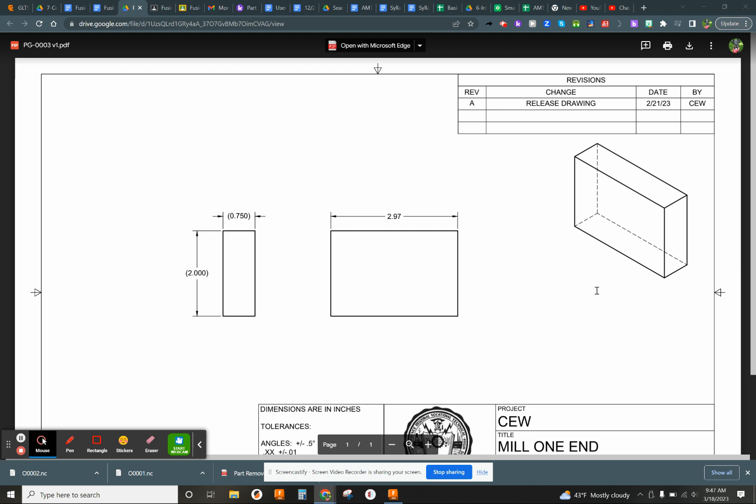We're on to the next part in this series, PG-0003. What we're doing is we're going to use Fusion 360 to make code and mill one end off to clean. So we're going to bring our model down to 2.97 long. I have already renamed my file for PG-0003. So stop and do that right now if you have to do that.

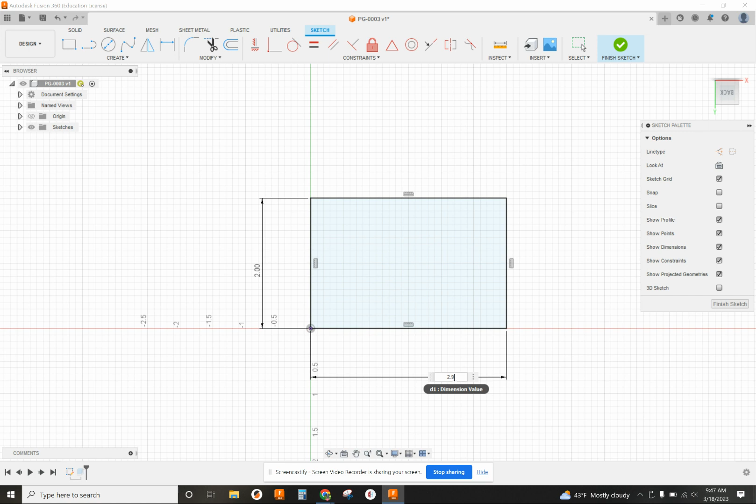So file, save as PG-0003. We're going to go back to design, and we're going to open up our sketch down here and change this to 2.970. Finish that sketch. It'll update the length of our part to 2.970. Going to go back to manufacturing. All right. And we're going to do a new setup. And we can do it facing this same way.

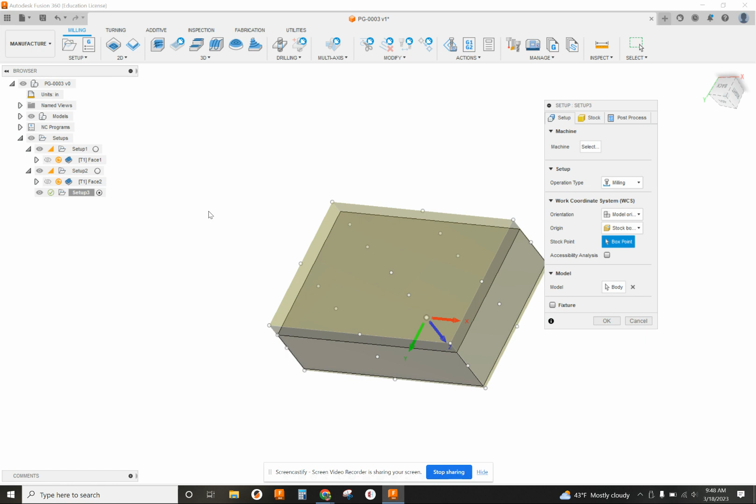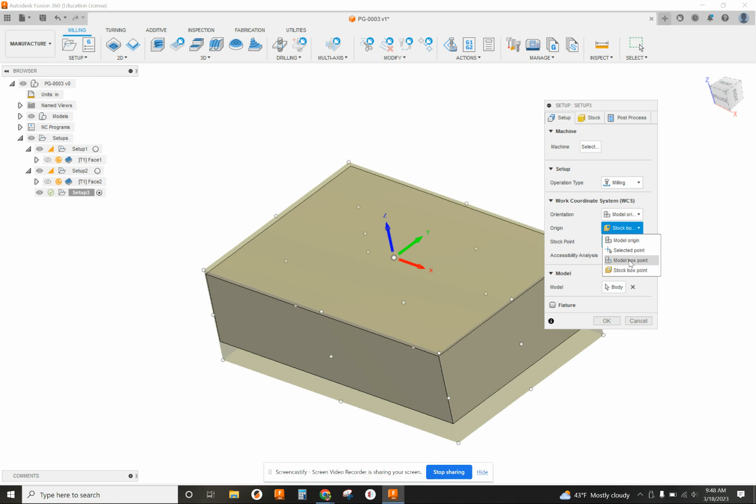Setup, new setup. Oh, actually, looks like we want to flip this upside down. That's fine. We're actually going to change something here, but we can keep this orientation. What we want to do is change where this point is here, where the X, Y, Z come together for our datum. We change the origin from stock box point to model box point, and then we're going to click this one up here.

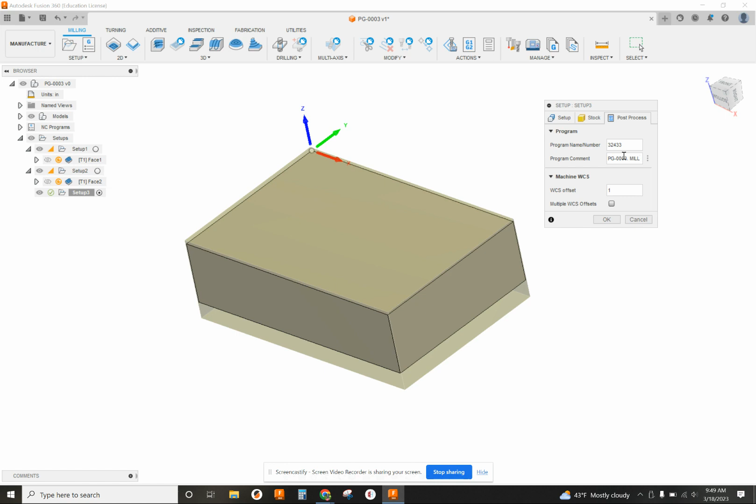So we want to ignore this stock that we've already cut off and basically go to the part where it is currently. Make sure that's done, or it won't work right. The stock will be fine as it is from previous. And post-processor, we want to give it some other name, whatever you want it to be. And then, of course, our comments, PG-0003. And this is going to mill one end clean. G54 upper left.

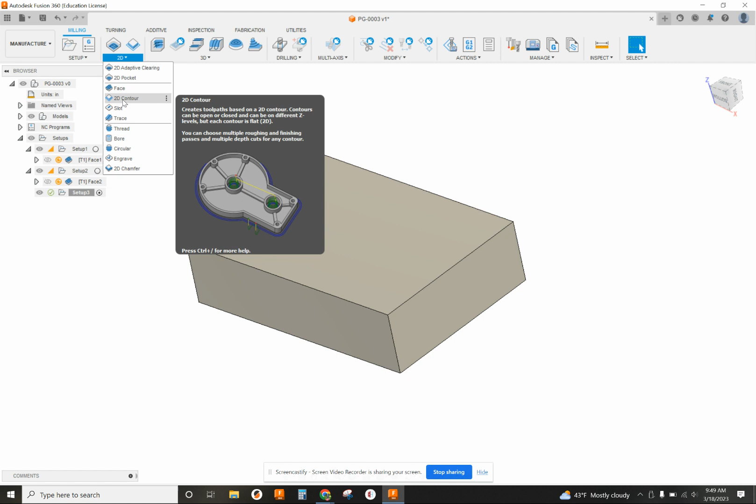Okay. So now for setup 3, we're going to do what's called a contour. So click on 2D, then on 2D contour. That just means it's just going to cut along an edge. So we're side milling, right? We need our tool. It threw the facing tool in there. That won't be good for side milling. We need to go make an end mill for this.

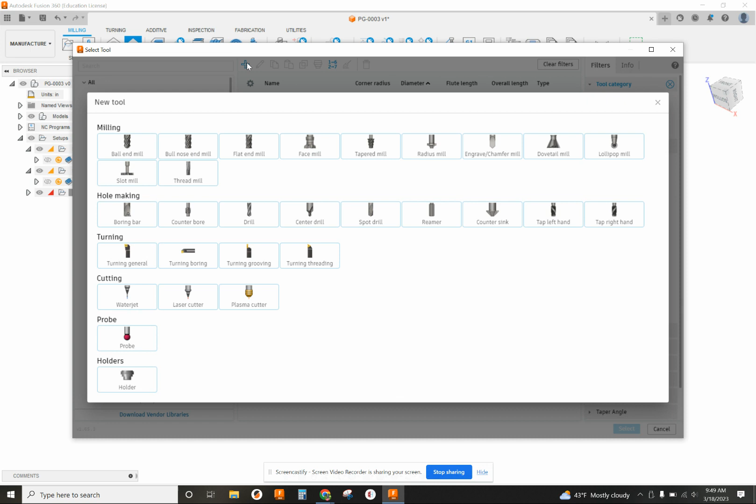So we're going to go click on your own tool library, and we're going to do add. This time flat end mill. Like before, the description is the only thing I'm going to put in here: 1/2 flat end mill. Cutter itself is going to be a flat end mill, inches, clockwise rotation. Number of flutes should be 2. High-speed steel is good. Got to change the diameter to be 0.5. Shaft diameter will automatically be the same as that.

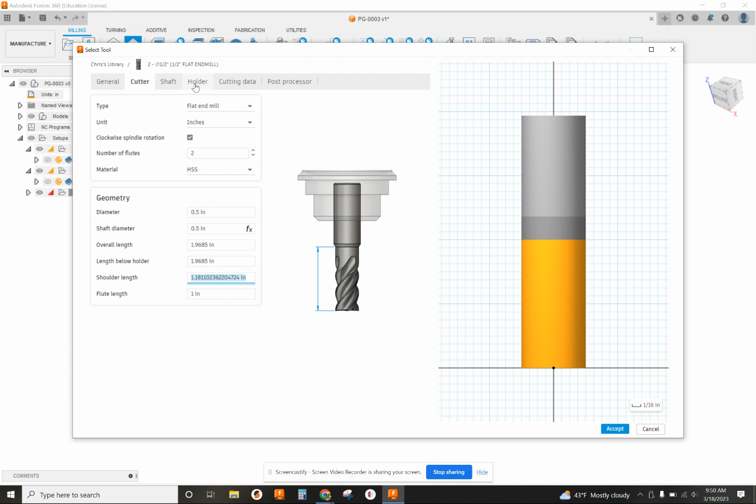The overall length isn't really important. What's important is the flute length. Now we have a part that's 750 thousandths, so we're going to need at least that. So I would change the flute length to 1 inch. The orange area is the cutting area. All right. Skip shaft, skip holder. We got to do some cutting data.

Spindle speed for 1/2 inch we know is 1600 from our calculations. Cutting feed rate of 40 inches a minute for this is too much by a lot. So I'm going to change this to 10.0. Tab. All right. 1600 RPM. Cutting feed rate's 10 inches a minute. That's all we have to do.

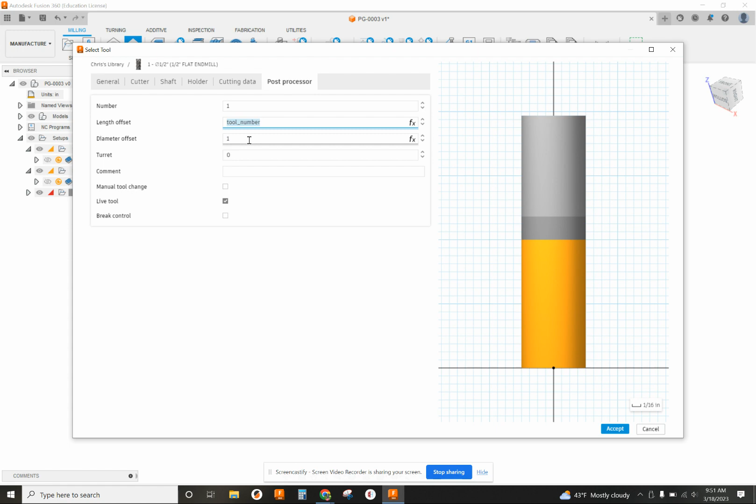Post-processor, it gives us tool number 2 automatically. If it wasn't, I would put this as tool 2. Or you could put it as tool 1. Doesn't matter, because it could be a separate program you're using this on. We can always change these things later on. So I'm going to accept that. And then with that highlighted, I'll select the flat end mill, and then go to the next tab, which is geometry.

If I just want to cut across here, that doesn't quite work, right? It wants me to select an edge. The problem is, if I go back to contour again and reselect my tool, flat end mill, and go to here, if I try to click the edge, it's going to click the entire edge. And that's no good. We don't want to cut all the way around the part. We just want to cut the end. Let me unselect that.

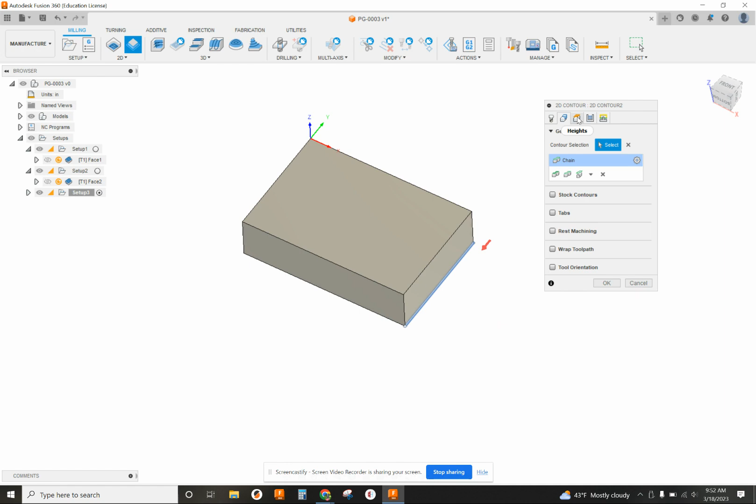So X that out. What I've got to do is hold down my Alt key. With that held down, I can click on just this one line. So it's going to cut from here this way. Heights, I'm not going to mess with that right now. It's nothing we're going to get into until later on. Keep this simple. The passes and linking, we don't have to change anything. So we just click OK. And that shows this coming down and cutting this edge.

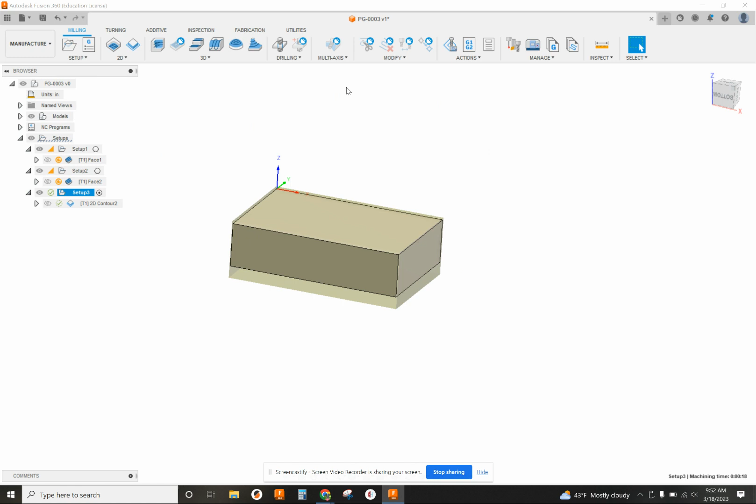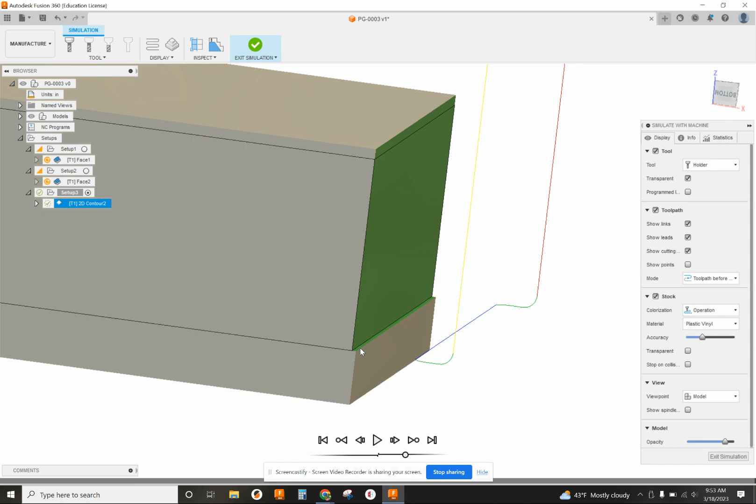So if we simulate setup 3, it comes down and it sets. One thing I have a problem with here is when this cuts to the depth, it doesn't quite cut. We should have that drop down a little bit lower so we don't end up with that extra material sticking off. So I want to bring the end mill down further in the Z-axis. I'm going to exit my simulation, go over to 2D contour, and double click on that icon.

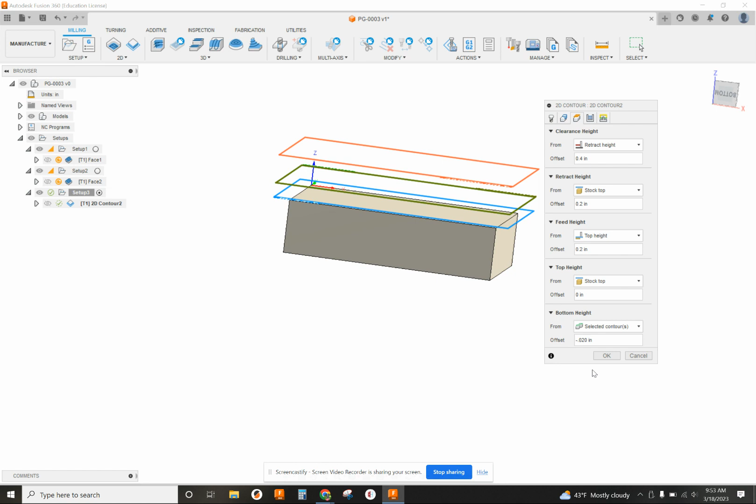I do want to make a difference in one of my heights. So I'm going to go to the Heights tab, and where it says Bottom Height, From Selected Contour, I'm going to go minus 0.020. So we'll go a little bit deeper. That drops it below this bottom surface so we can have a nice clean edge. I'll simulate that again. You can see that's going down a little bit further. That's good. Exit the simulation.

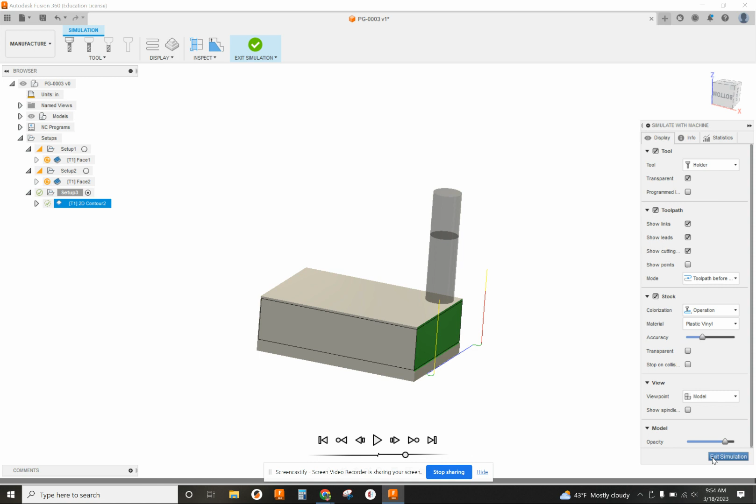I'm going to save this. And now I can go ahead and post-process just that one setup if I want. Put my O in there. Make sure my parameters are good. And post it out. View NC code. And I can copy and paste this into the Google Doc. And that's all there is to contouring one end.